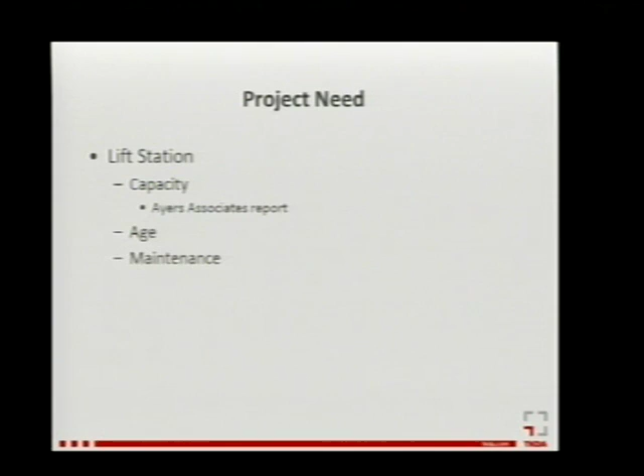Hi, I'm Eric Klingbeil with TKDA. I was the engineer for the North Interceptor routing study. Just to rehash what Ron and Reed have already said, this project was needed because the existing lift station on site will not have capacity for the ultimate build-out of the north area as denoted by an Ayers Associates report from March of 2009. And also the lift station is aging. And with any lift station, especially older ones, the maintenance needs get greater and greater as the years go by.

This shows the ultimate expanded area. Let's see if the mouse will show it. Eventually, this pipe and lift station would need to take all of the sanitary sewage from the entire pink area, which it just doesn't have the capacity for now. So in the project, there were really two alternatives. The lift station could have been replaced and the downstream pipe upsized, or a gravity sewer alternative could have been provided. The gravity sewer was chosen due to its reliability. There's no pumps to fail, reduced energy consumption, and the reduced maintenance needs of the pipe.

When working with the city staff, the goals of the project really came out to be to minimize the project cost, to serve the expanded area, including a small area across the river. If I can go back up. A small area, where's my mouse go? In this area here, across the river, which currently has houses which aren't served by sanitary sewer.

To minimize the impacts to the environment, minimize the impacts to private property, both in not impacting any developable land, reduce the amount of easements, and to minimize the impact to residents and businesses, including accesses to the business and interruptions to their services.

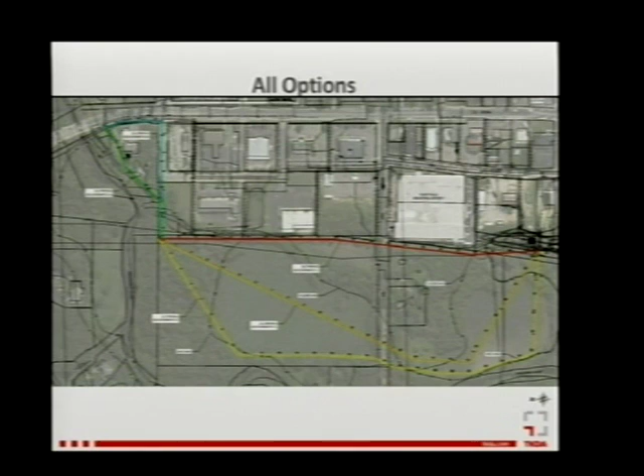It's just a comparison showing all 5 of the options, A, B, and 1, 2, and 3. For all the options, 21-inch pipe is going to be required to provide the ultimate service area. An access route will need to be provided for maintenance and access to all the manholes. Since this would be through various different private parcels, an easement will be required for the entire length.

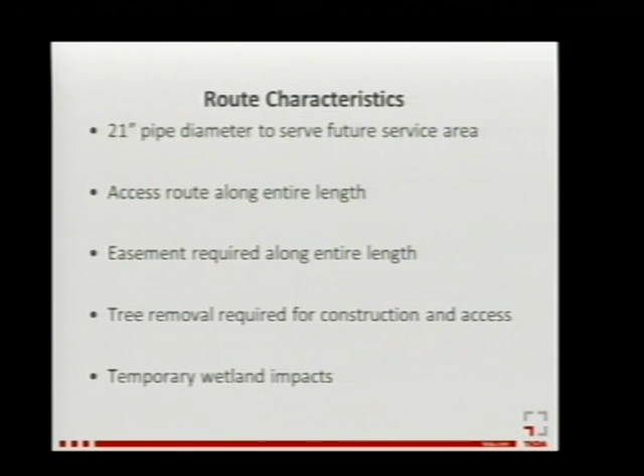There will be tree removal for construction and access, and there will be temporary impacts to wetlands, no matter what route is chosen for this. So we looked at all of the goals that we had discussed with the city, and we created a decision matrix which had a lot of subcategories under each goal. We used this as a decision-making tool to really weed out what was our best option.

Some categories were weighted higher than others, but when it all came down to it, it was determined that option 2A was our preferred alternative. So that one is the one that follows in the green space from the lift station down to the common point, and then follows the existing tree line on our way over.

Also, I should note that the area for service across the river where there are existing homes without sanitary sewer is basically right across the river from this point here. So for them to be served, likely the river crossing would be right in that area.

Option 2A was recommended. This is relating back to our goals originally. It was recommended because, relatively speaking, it has the lowest cost out of all of them due to it being the shallowest of all of the routes. So it's not as much excavation, and we're also less likely to hit bedrock going through this. All other factors for cost were roughly comparable between the other options, and that even includes the length of pipe.

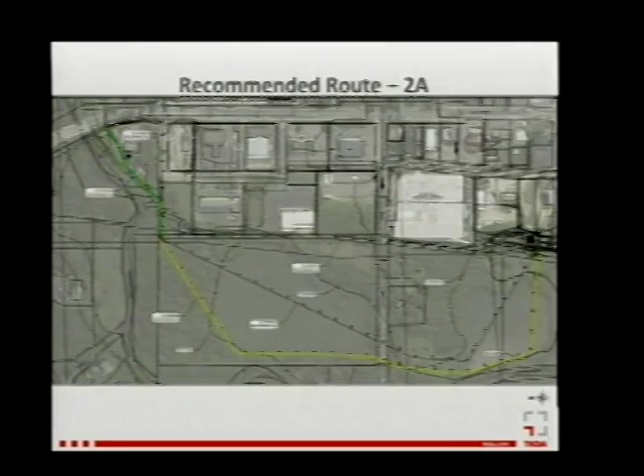While this option does look the longest now, when factoring in the eventual river crossing here, the lengths actually become quite comparable in the long run with the ultimate build out. Along with that, the river crossing, this one best allows our ability to expand to serve the entire service area. It has the deepest river crossing, which allows for an easier and safer river crossing.

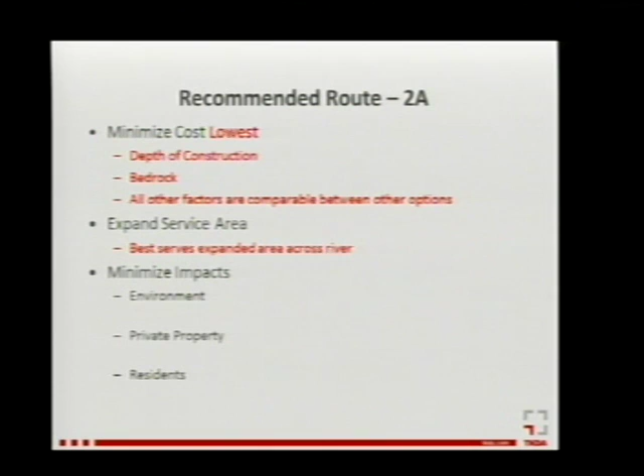The environmental impacts on this are marginally higher than some of the other ones, but they're quite minor compared to all of the other ones, and we already are impacting trees and wetlands with every option anyways. Private property and impacts to residents are roughly the same, or some of the private property impacts are actually slightly less because we aren't impacting any developable land and we are minimizing the impacts to any farmland. And with that, I will turn it back over to Ron.

So this evening on this particular item, I think we're taking them with the lift station route initially and then the St. Croix Street Pond after that. So for the lift station routing, what we would do next is to refine our design a little bit and identify easements that would need to be acquired and begin working with property owners.

There is some latitude in adjusting things a little bit within the basic concept of the route to address concerns that the property owners might have. But the idea is tonight to approve the basic route so that we can continue on with that. So with that, we would be happy to try and answer any questions.

I have a couple questions. We went through this design route that you were looking at a couple of months back. And I believe we were talking about it then, that the current capacity of the lift station is okay, that today there's not a concern with the lift station, the way it's operating. Is that true? The current capacity of the lift station meets the current capacity needs plus some additional, but doesn't have a lot of leeway for a lot of additional capacity. Okay. Yeah. And I believe that's what we discussed the last time when we got together.

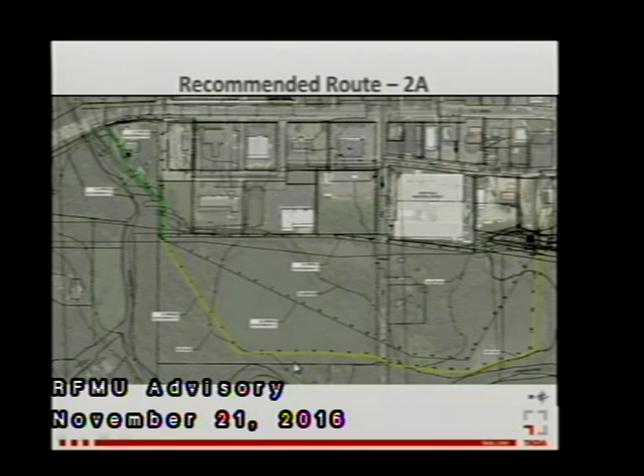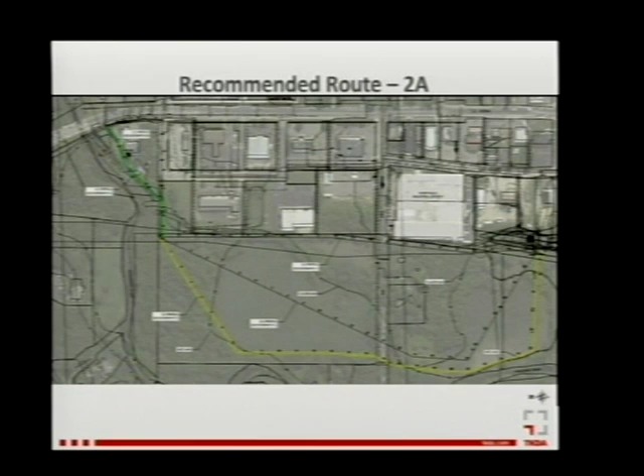But to go west for development, you would have to go under the river? To the west is under the river, yes. Okay, thank you. Why don't you just bring up the pink area. There's one.

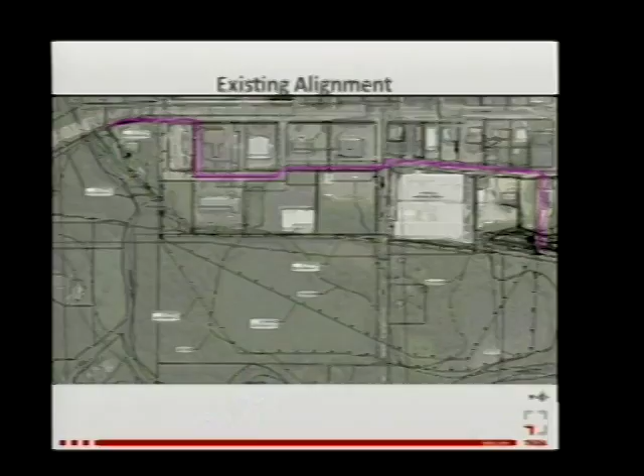So the pink area that you see there is the north sewer area. And again, we didn't rip the previous studies apart; we're following the previous studies that identified that pink area as what wants to be served by River Falls Municipal Utilities with sewer. And it does go, if you could point with a pointer there, across the river, this area right down there. In order to get that into the sewer, this is what we need to do.

We need to have the interceptor close enough to the river to be able to get under the river in order to serve that area. If we were to throw away that area forever as far as being part of the city or wanting to be sewered with municipal services, then it would not be a factor, but we're really just following the previous plans and wanting to serve that area.

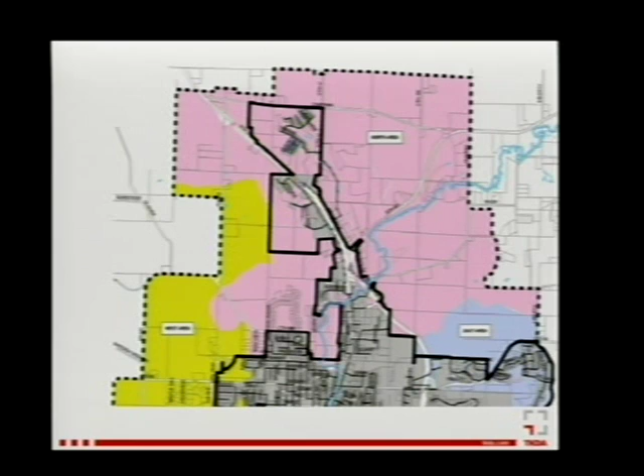Is there consideration as to continued growth here and how long this would accommodate that? That's something we talked about the last time we were here when we were looking at pipe sizes for the area downstream. The 15-inch pipe that's downstream that then turns to 18 will actually serve the area as it expands for quite some time, but the lift station and force main are under capacity, so those would have to be replaced. The 21-inch pipe should serve the extended development area, plus some additional.

There was also, at the time of the AIRS report, a 1 mile out from that, and it doesn't quite do a 1 mile out, but the projected expansion, which should be like a 50-year expansion, it does serve that plus more. So it fully serves that pink area. That was our compromise in our discussions. We talked about that mile out and thought that might be a little bit too much area. If we're already talking about this area being a 50-year area, we thought accommodating a 75 or 80-year area would be a little bit overkill at this point in time.

In that pink area, you mentioned the area that's not served, and I'm new to the board as well, so I'll take whatever you say with a grain of salt, I guess. But I have lived in this town for quite a while, and if my understanding is correct, some years back the project was delayed or obstructed due to a private property issue. Is that no longer the case? I believe it's in that area behind the big industrial building, River Falls Heating, right across the river. I see that easements are part of this. Do we have cooperation? Have we checked in with the neighbors? Where are we at?

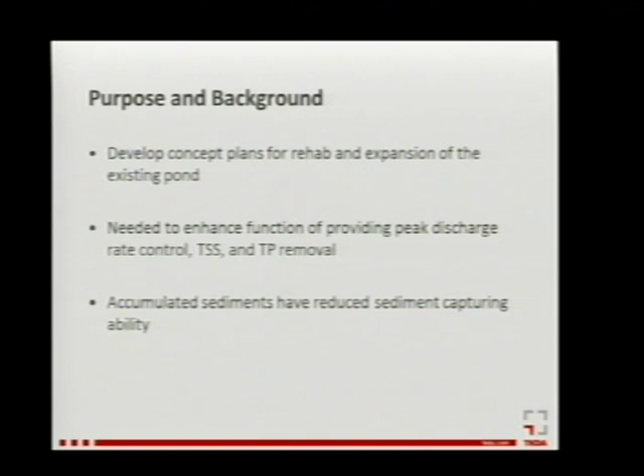Sediments have accumulated to a point where the sediment capturing ability of the pond has been significantly reduced, and you'll see that here in a minute. Constructed in late 1990, early 1991, the pond was constructed on permanent limited easement. The pond is bounded by an abandoned railroad embankment to the west, and this will all make sense when you see a figure. A commercial building and parking lot to the north, steep slopes to the east, and a ravine that drains to the Kinnickinnic River on the south. The abandoned railroad embankment to the west is what defines the floodway and the floodplain boundary. The existing St. Croix outfall pond treats about 91 acres of the city.

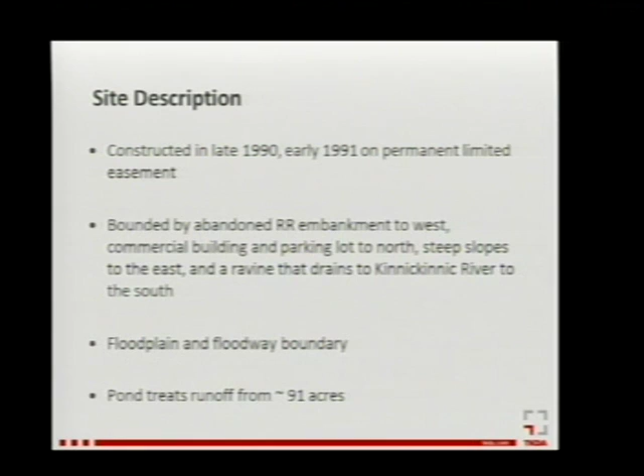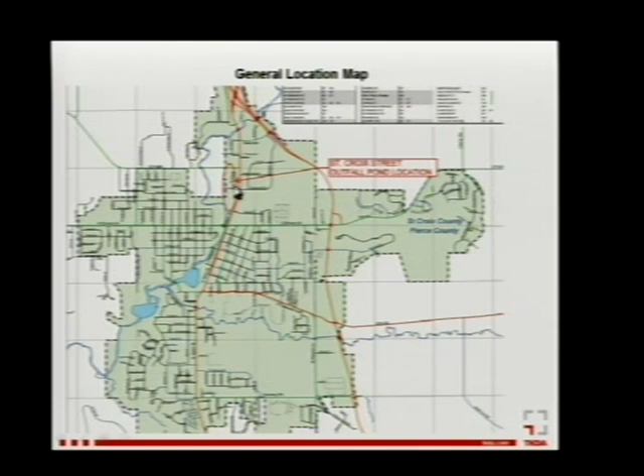For those of you not familiar with the location of the pond, this map gives you an idea of where it is in relation to the River Falls city boundary. It's right there. Here's an aerial map of the pond showing the floodplain and floodway boundaries. North is to the right on this map. And I'll point to the existing pond here. Here's the existing pond. You can see it dark here.

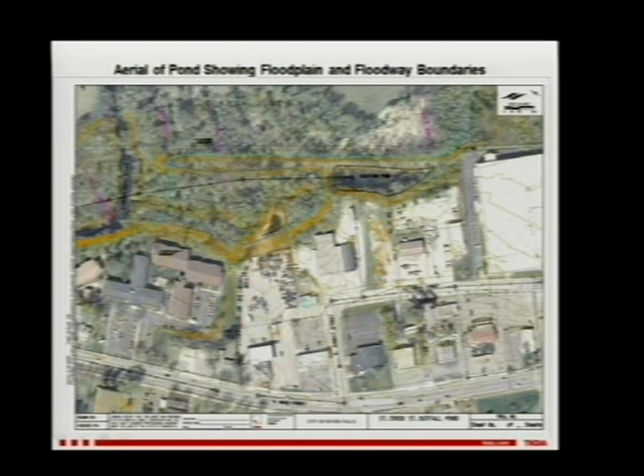And then I just want to point out, this is the railroad embankment to the west. Here's the Kinnickinnic River to the south. And here's those steep slopes I was talking about to the east. And then here's a commercial building to the north. So here's the existing pond right there. And you can see here's St. Croix Street. And then here's North Main Street.

So let's see, do you guys see the pond here? I think I might have lost the... You gotta shake it a little. I'll have to... yes. All right, so let me just see if I can get this mouse back. I'm not really getting the mouse in there, Ron, or Reed, do you see that? I do have a pointer too. Nope, there you go. Now I see it. Perfect. Okay.

So the existing pond is right here. Here's the existing pond. This is the old railroad embankment to the west. And then this is that commercial building. That's River Falls Industrial Center. The old coal pack building.

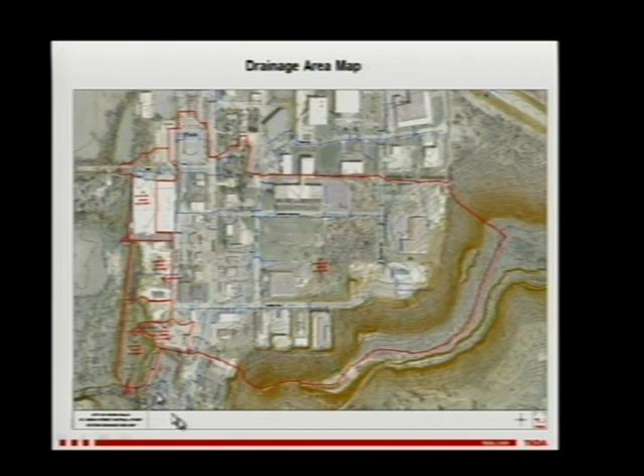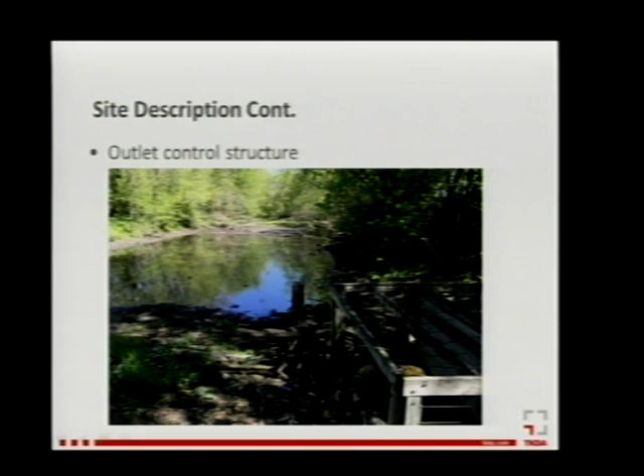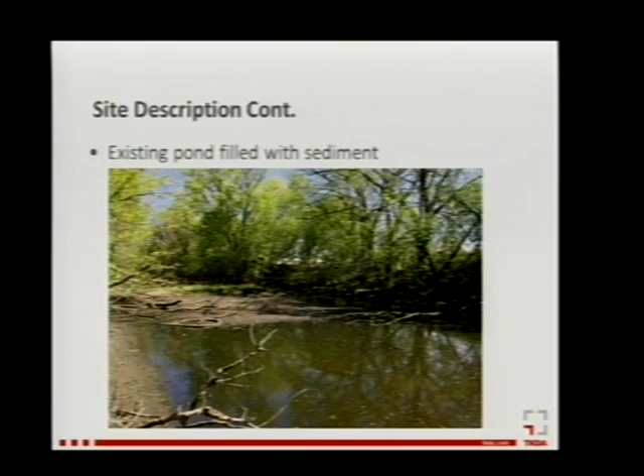We looked at a total of 5 proposed concepts. The first 2 concepts maximize the area between the railroad embankment, the parking lot to the north, the steep slopes to the east, and the Kinnickinnic River to the south. These 2 concepts were found to be infeasible, but I still want to give you a brief overview of what they were, and a figure of these 2 concepts will be shown in the next 2 slides.

In both concepts, we looked at a 3-cell configuration for the pond, with the first 2 cells being wet ponds. The difference between the 2 concepts was in cell 3. Cell 3 of concept 1 included an infiltration filtration basin for the last cell, and cell 3 of concept 2, in lieu of the infiltration filtration basin, we looked at using rock weepers.

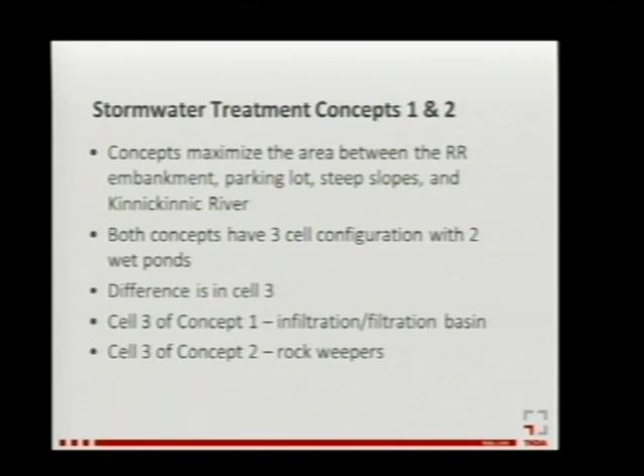Maximizing that area of cell 3 allows for maximum water quality treatment, rate control, and volume control. So that's why we looked at this, to just maximize that entire area.

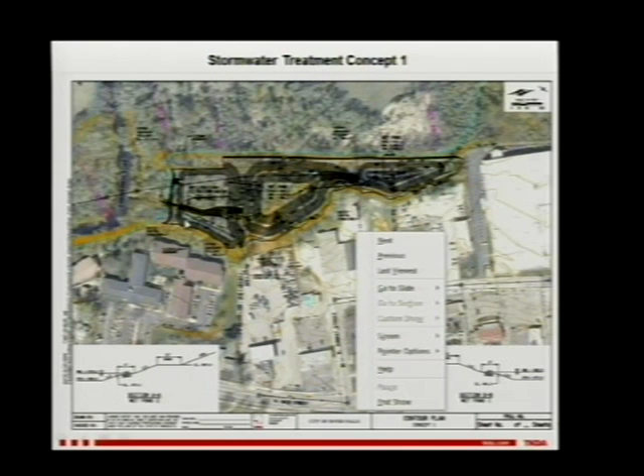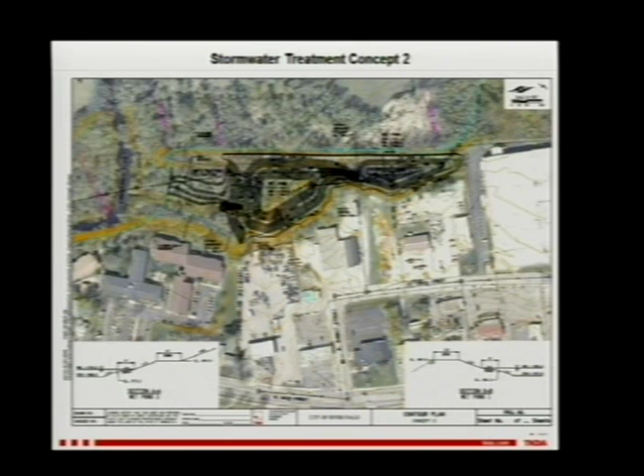There we go. This is stormwater treatment concept 2. Basically, cell 1 and cell 2 are the same. Cell 3 is using rock weepers in lieu of the infiltration filtration system. These rock weepers would be placed along the contour, avoiding large trees that provide the most shade. Low flows would discharge on the top and filter through the rock weepers, and then high flows would bypass and outlet directly into the ravine.

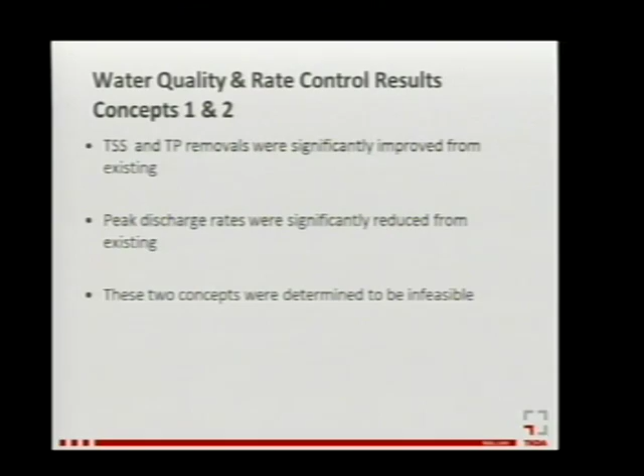Could you describe what rock weepers are? Yep, rock weepers. They're basically about 3 feet wide. It's just a bunch of rock piled up about this high. There are some smaller stones and some larger stones, and water just has to filter through them. So it's just a way to provide stormwater treatment. It's being filtered, like an aquarium filter, but on a very big scale. But it also slows down the water and lets it pool up behind those weepers, allowing some to infiltrate into the ground. Slow it down, let it infiltrate, cool it off. You bet. Okay, thank you.

The results of concepts 1 and 2: total suspended solids and total phosphorus removals were significantly improved from existing conditions. Peak discharge rates were significantly reduced from existing conditions, which is all positive. However, these 2 concepts were determined infeasible after we had a meeting with the DNR.

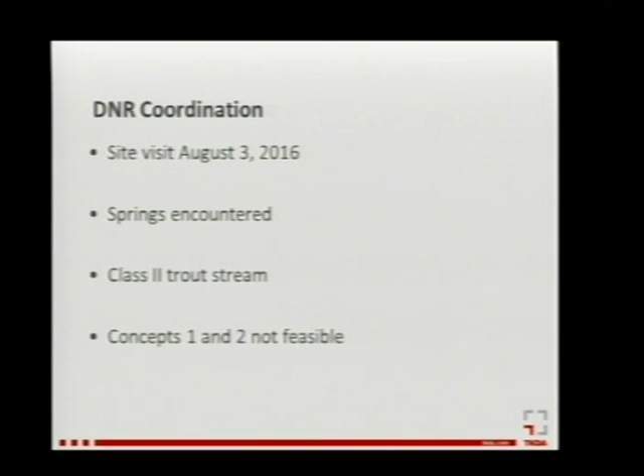A site visit with the DNR was held on August 3rd, 2016, to discuss the 2 proposed concepts. As part of the site visit, we inspected the existing pond, and we walked the entire ravine downstream of the pond. During the field walk of the ravine, we encountered multiple fresh cold water springs. The presence of these springs confirmed the Class 2 trout stream designation on that ravine. As a result of these findings, concepts 1 and 2 were considered no longer feasible.

We went back and we developed 3 additional concepts. And figures of those 3 concepts will be shown here in a minute. Concept 3, I'll just give you a quick overview of what they are. Concept 3 regraded the existing pond within the existing footprint to provide a wet pond with the maximum amount of storage for water quality purposes.

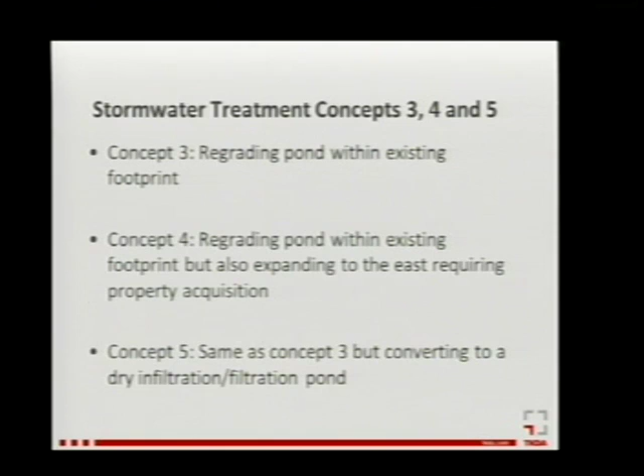Concept 4 included regrading the existing pond within the existing footprint, but also expanded the pond to the east. This concept would require property acquisition. And then concept 5 is the same as concept 3, no longer expanding to the east, but we're converting the wet pond to a dry pond, dry infiltration pond. And converting that wet pond to a dry pond provided more storage for rate control.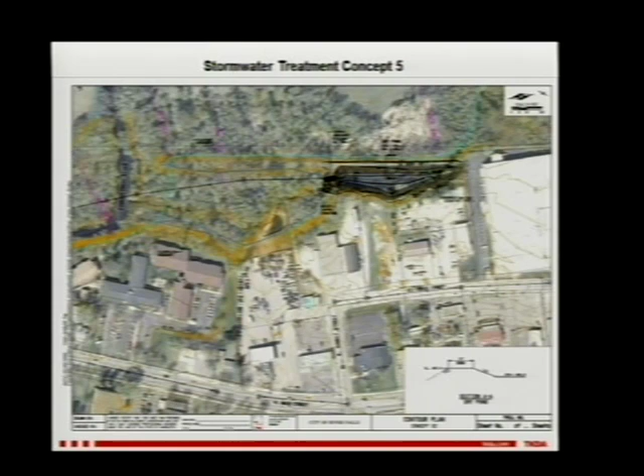Go ahead. I was going to say, so essentially it will be a pond that doesn't have standing water in it? Is that the difference? That's concept 5. Yes. It wouldn't have standing water in it. Okay, so kind of like a detention basin. Yep. It would be dry after a certain period of time. Water would flow into it, it'd pond up, and then it would discharge out, and you'd eventually be dry, probably within 48 hours after the storm. Okay, thank you.

So the discharge would go down or just go lateral? A portion of the smaller storms would come in, and they would just infiltrate. But you hit a certain storm, infiltration doesn't have the capacity to take it all, and it would start to discharge. But the discharge is controlled. We've got designs of all of the outlet control structures, so they'd all be controlled discharges.

Whereas option 3 really doesn't have any infiltration? You may still get some infiltration. Even with concepts 3 and 4, you will eventually get some infiltration into the soil profile, even with a wet pond, unless we were to line it. And we've had discussions about potentially lining these ponds to maintain a permanent pool. But at this point, we assume that concepts 3 and 4 are wet ponds and they'll hold a permanent pool.

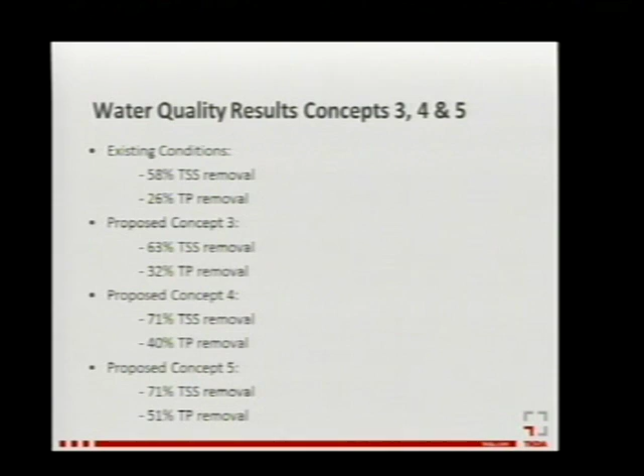This table provides a peak discharge comparison of concepts 3, 4, and 5 compared to both existing conditions and pre-developed conditions. We originally were trying to see if we could design a system that would actually match pre-developed conditions. Concepts 1 and 2 that were thrown out, we were getting fairly close to matching pre-developed conditions for some of the lower storms. Concepts 3, 4, and 5, however, were not able to achieve pre-developed conditions,

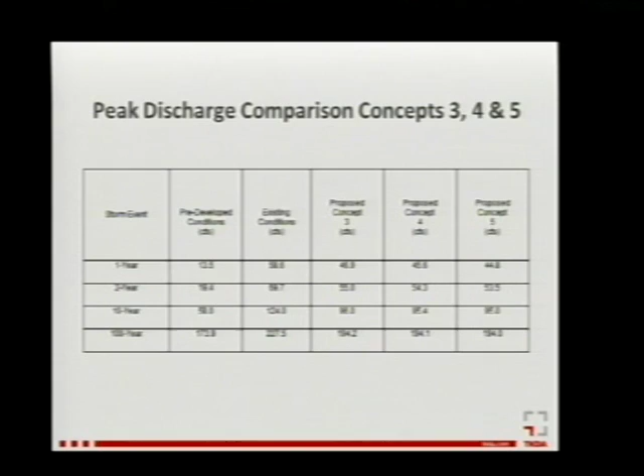but we are able to reduce discharges from existing conditions for all 3 of those concepts. And they all have comparable results. When it comes to rate reduction, they're all fairly comparable. So just to summarize what we talked about here, concepts 1 and 2 were eliminated due to the springs and the trout stream designation.

The increase in TSS and total phosphorus removal and peak discharge rate reduction that concept 4 provided over 3 was not large enough, we felt, to justify the property acquisition and also the increased excavation. There'd be a lot more excavation expanding that pond to the east.

And then concept 5 converted the wet pond of concept 3 to a dry pond, call it an infiltration/filtration pond. And I say infiltration/filtration because you're going to get both. Increasing the storage volume results in increased TSS and TP removal and rate reduction from concepts 3 and 4. So our recommendation is to move forward with concept 5.

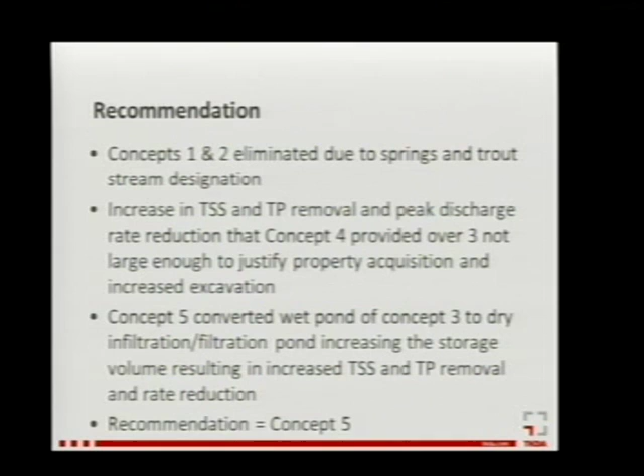And I just want to point out concept 5 could always be converted to a wet pond in the future if some of the maintenance requirements for this filtration/infiltration system were found to be expensive. Yes, excessive, exactly. Yep, you bet. That brings a question. The dry pond, does it have to be excavated on a regular basis? I assume it fills up after a while.

Yes, so just in general, real rough. That existing pond was constructed in the early 90s. Has it been cleaned since? Probably not. We usually throw out a number of every 20 years. Usually you design wet ponds to have capacity to handle sediment for approximately 20 years. These infiltration/filtration systems, if we design it, we'd probably design for every 5 years.

You'd have to get in there and scrape off the top layer of sediment that might accumulate on that media section. That's just a rough number. Instead of 20 years, it might be every 5 years, but you're getting enhanced treatment. Okay, thank you. Matt, can you elaborate just a little bit? For concepts 3, 4, and 5, you have the comparison table you just went over, and you showed it being slightly better than the existing pond.

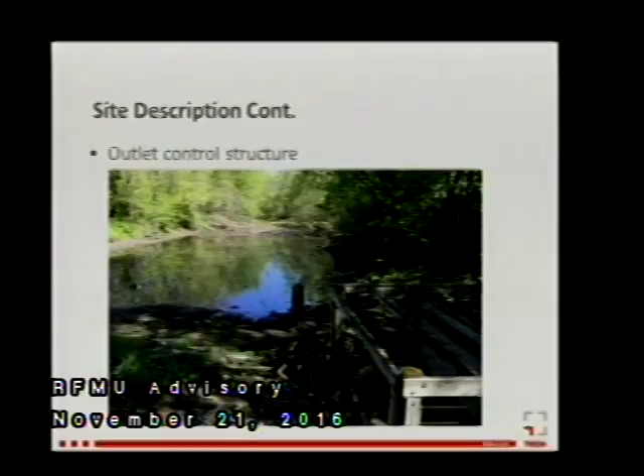As part of our proposed concepts, we are looking to pick up that 24-inch pipe and route it through the pond. We don't want it to bypass; right now it runs on the west side of that old railroad embankment. So we would be picking that up. I'd like to ask some questions. I want you to tell me when the pond was put in. You said 1992?

The holding pond. The record drawings that we have were dated, I believe, so we're figuring it was constructed in 91. You're wrong. 1972. Did you have discussion of the easement for that holding pond? It was 1972, never been cleaned. Did you have a recommendation from the DNR to go in there and clean that pond? Those questions would have to be addressed to them.

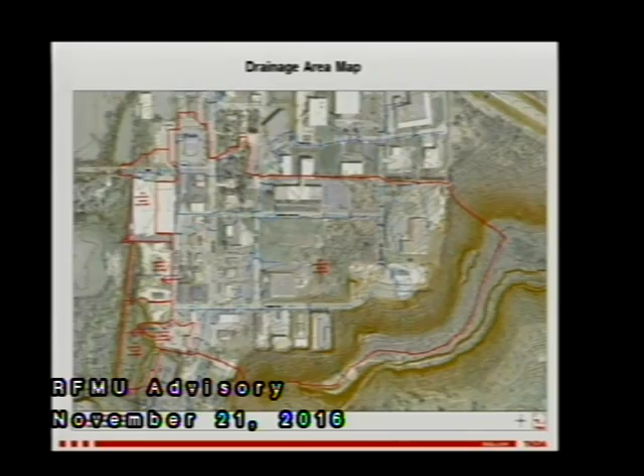So just to address the 1990-91, there were some plans put together for a pond in 1990-91, and the outlet control structure was all designed and the downstream, so there may have been a pond there previously, but there was some work, correct me if I'm wrong, work done in 1990-91 compared to that existing plan that we have. So, limited easement is where this pond was built on. So this pond may fall. Yeah. Again, I'm not sure the easements that are over this existing pond.

Part of our process here is we've engaged a land acquisition firm that specializes in this. If you recall back here a year ago when we laid out the whole plan, our intent is to document what easements we have for existing facilities and where we lack any easements for existing facilities. I know for a fact there are easements in and around this pond area. Whether they cover the exact footprint of the pond, that would be something we would want to determine before we do anything else out there. So some of those details would be forthcoming.

Downstream, there's all sorts of questions with regard to the existing sewer main that was constructed in the early 70s. The sewer did go in, I believe, 71. And I've seen no evidence of any easement over the existing sewer area, but what we want to do is do a thorough title search, make sure that is the fact. If that is the fact, we need to do what's right and acquire easements for operating a sewer that's been operating for 40 years. We could talk about prescriptive easements, things like that. The suggestion has been, no, we should go back in time and identify easements that should have been acquired in 70 before it went in and do that.